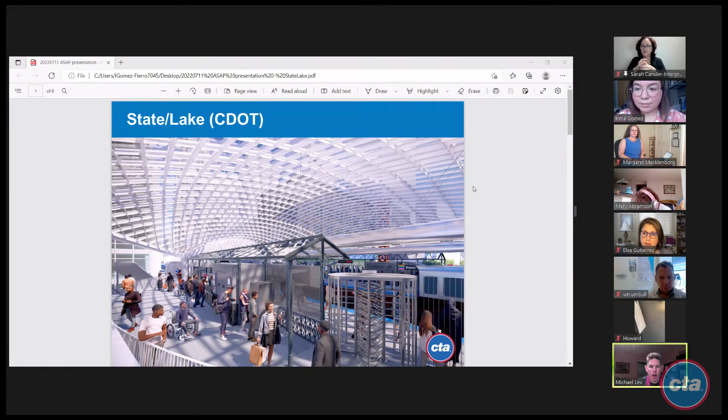CDOT asked that I talk about the improvements being made to this station, which is currently under design. Here you can see a rendering of the new station interior. The station will be totally replaced, and one of the features is a full coverage canopy to better protect all riders from inclement weather, in addition to providing much more space for circulation, making the station accessible, and providing larger platforms.

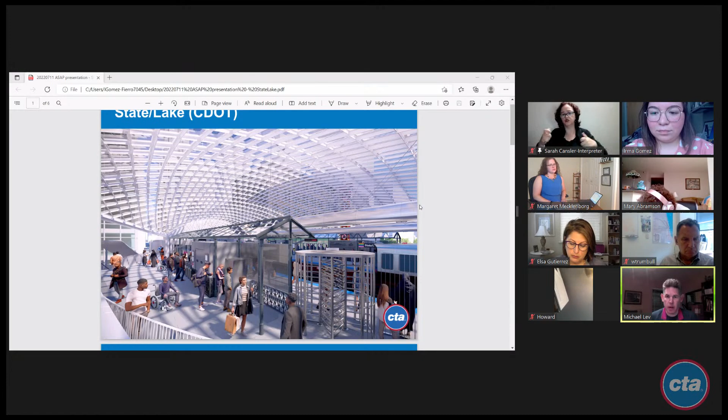If you want to flip to the next slide. So here you can see a street level view of the station. The station will operate similar to the way it does today, with platforms on both outside parts of the station, where generally you take the stairs, but for step-free access, you would take the elevator on the side of the street where you're boarding the train. There will also be escalator access on the east side of the station. In terms of step-free access, you would choose the elevator on the side where you're boarding.

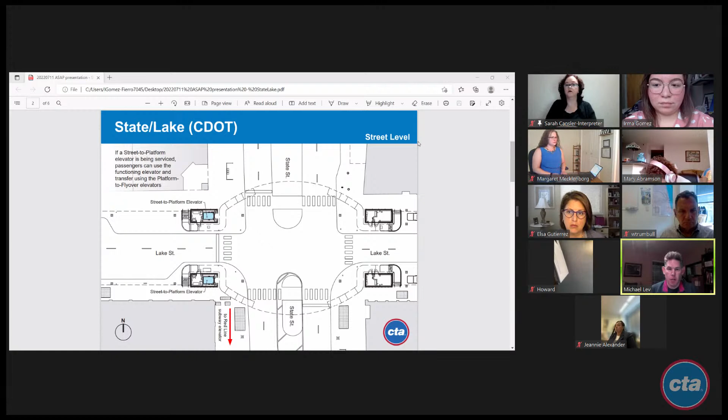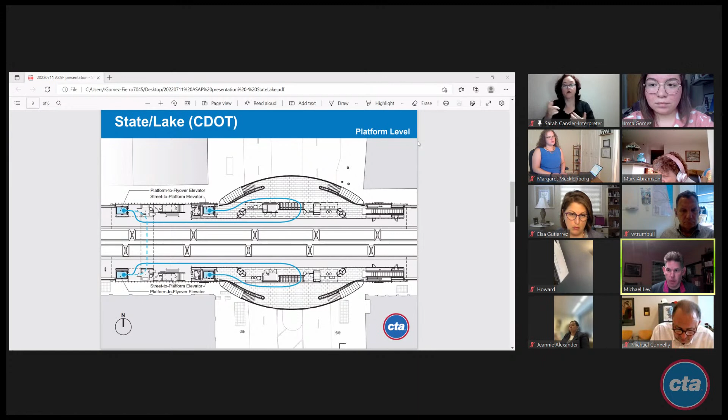You can see them here identified on the left side of the screen in blue. If you would like to move to the next slide. Additionally, a new feature of this station will be a crossover bridge where, after paying your fare, you can get from one side of the station to the other. This will also be accessible step-free via elevator. This will allow for transfers, or if you accidentally board on the wrong side, or if one of the elevators is not functioning, this provides redundancy. Next slide.

An additional feature of this improvement is an upgrade of the northern mezzanine of the Lake Red Line subway station, the mezzanine between Lake and Randolph. This mezzanine will be upgraded to have step-free elevator access as well. Right now, you are able to make a free Ventra fare card transfer between the two, and that will continue to be the case, where you exit one station and walk on the sidewalk to get between them. But this will greatly improve step-free accessibility at this northern mezzanine.

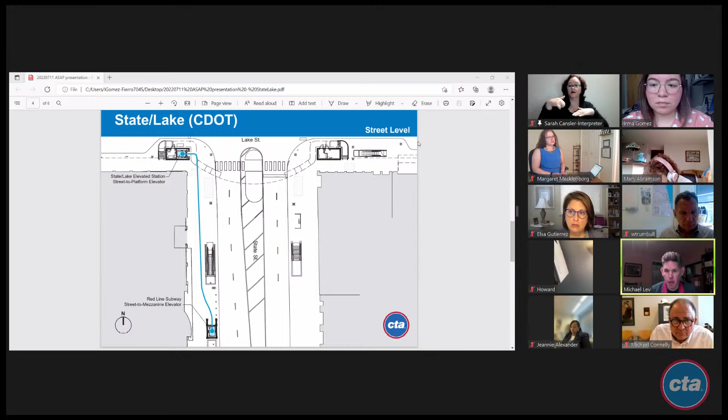In terms of general upgrades to the station, as the elevated station is totally being replaced, it will be upgraded to have full standard CTA signage, including braille and illuminated signage, as are the new standards for better readability. If you move to the next slide.

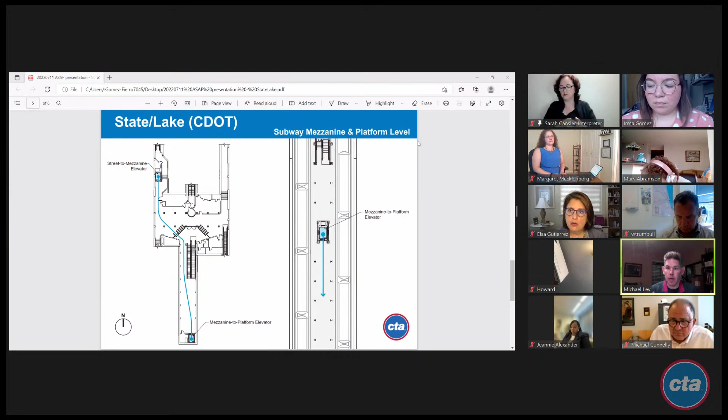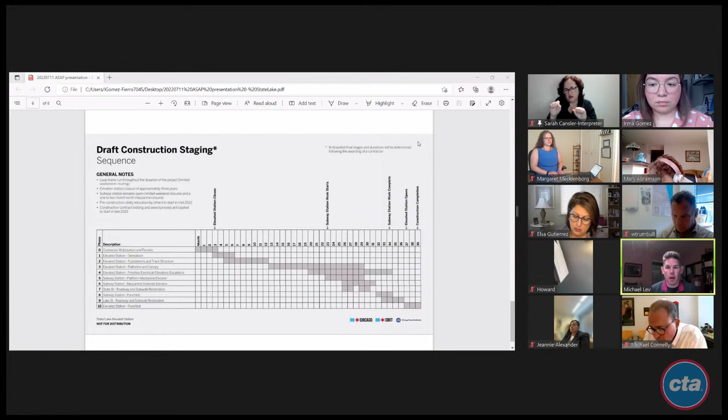The subway station will not be closed during construction, except for a couple of weekends. We are anticipating that the subway work would happen approximately halfway through the duration of the project. I believe that's my last slide.

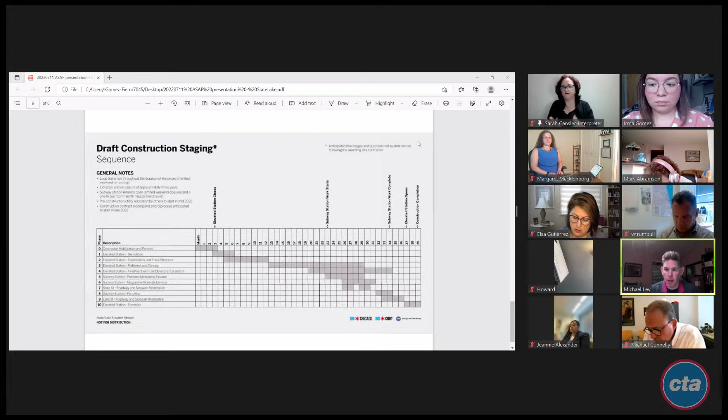This is Whitney Hill. Thank you so much for sharing with us. I'm not sure if this question is best directed to you or someone else within CTA, but my main question is, how will information about the new layout and the accessible routes be presented to riders? I'm curious about after completion, and how we convey this new system to riders.

So I can speak a little bit to what is happening pre-construction. I'd have to defer to CDOT or CTA as to what public information is post-construction. We have been hosting a series of meetings with people in the area, and I know that both CTA and CDOT issued a press release announcing this project. Mike, I think maybe Irma may be able to fill this one.

I know that for previous stations, they've had walkthroughs with the ADA committee after the station has been built. Irma, do you do that still? Yeah, let me just share screen.

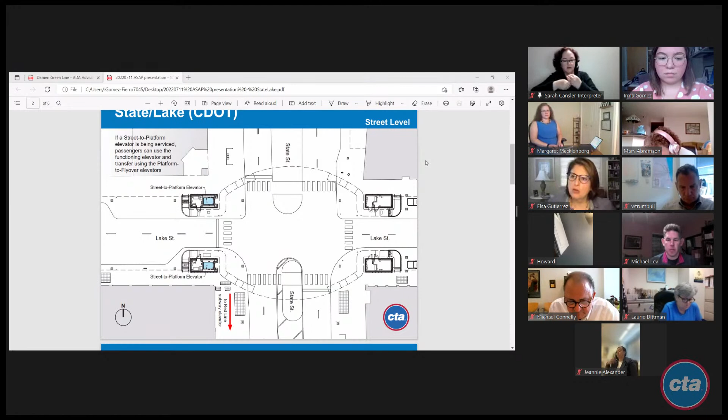I also kind of wanted to tag on to that. I recommend that if CTA's public information or whoever the designated person would be, reach out to as many as possible of the disability related organizations with this press release, but more than press release, info on basically everything pertaining to this, because a lot of the disability related organizations have mailing lists, and they generally put out a newsletter or calendar of events, something like that, monthly, or announcements on a monthly basis, sometimes quarterly. That would help get the information across a broad spectrum of the disability community. Some may not necessarily be affiliated with this committee. I don't know if that would be your public information department or who, but again, to reach out to as many of the disability related organizations as possible so that they could get the information to their people.

Robertson. Just wanted to straighten out the fact that I believe we're in pre-construction phase, so scheduling a walkthrough is probably 2 to 3 years away.

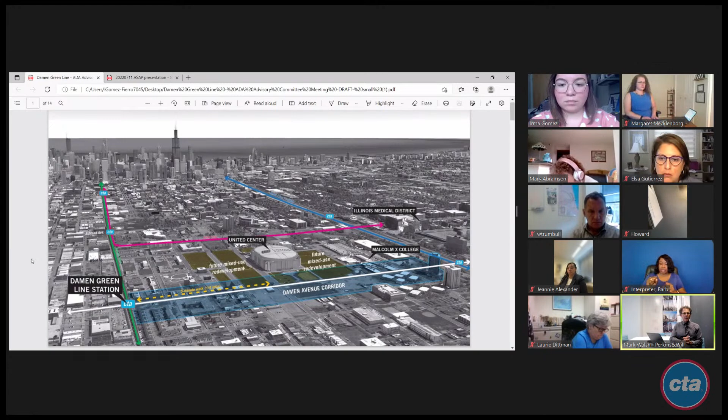Next slide, please. This is the site currently. The station house will go on this site, at the southwest corner of Damen and Lake.

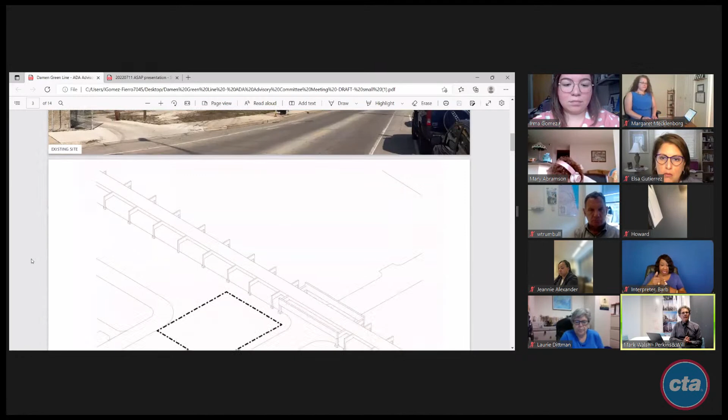Next, please. This is a brief schematic showing that location. You can see the existing CTA tracks running from lower right to upper left, and the dotted line shows where the station is going to go.

Next, please. This is just a schematic view of the station house. We've pushed it back from the Damen side of the site so there's a plaza at the east, and it will be entrance on grade, so there are no steps up or down from street level to plaza to station house.

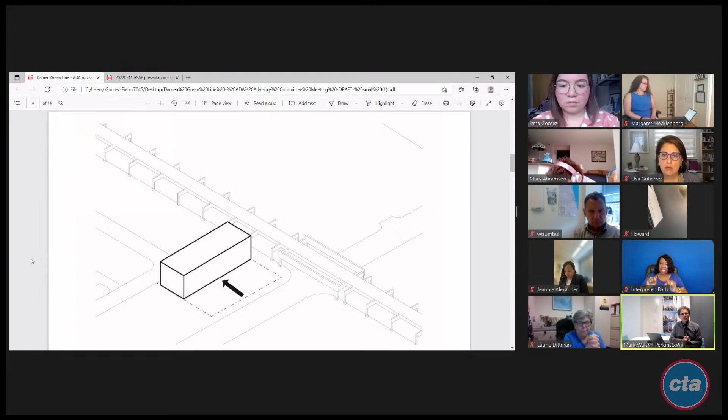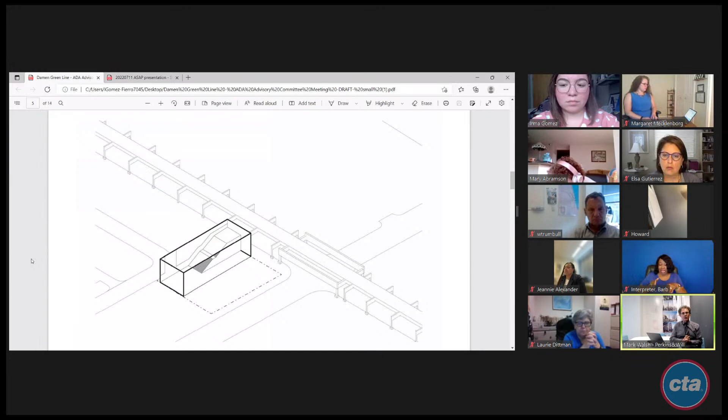Next, please. Here's a schematic showing the walk-up means to get to the platform. There is a large stairway that goes up to the platform level on the eastbound side of the tracks, and there is also an escalator in a similar location.

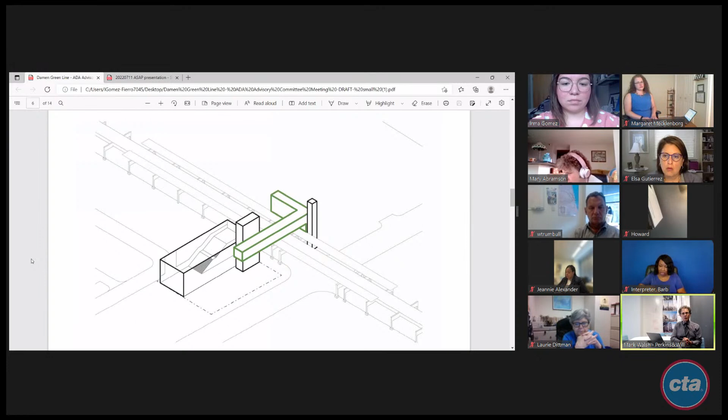Next, please. For step-free access, we have two means: an elevator at the station house that connects directly to the eastbound station, and for access to the westbound station, that elevator goes up to a bridge level that can be traversed across the tracks, with another elevator down at the north side providing access to the westbound side platform.

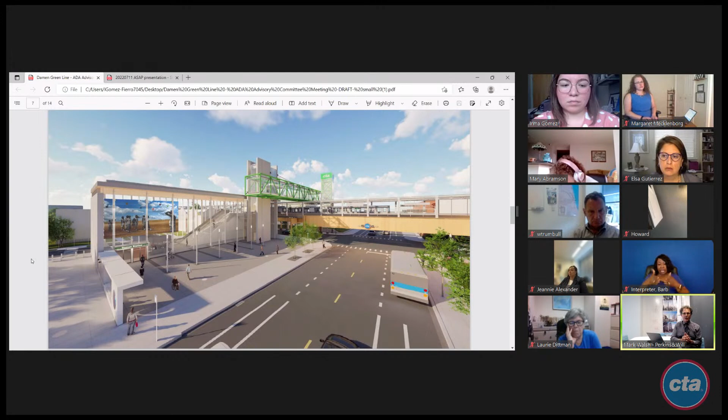Next, please. This is a ground level view of that same station. At the left-hand side is a bus waiting area, with buses running north and southbound for Damen. The entrance to the station is under the green banner at the left-hand side—an on-grade entrance that gets you into the fare area on the non-paid side, with gates that then allow access to the stairs, the escalator, and the elevators.

For what we call surge events, because this is adjacent to the United Center, there will be events where a lot of people use the station. The north side of the station, directly under the bridge at the right-hand side of the tower, has a surge entrance with additional doors and fare stations to accommodate larger numbers of people.

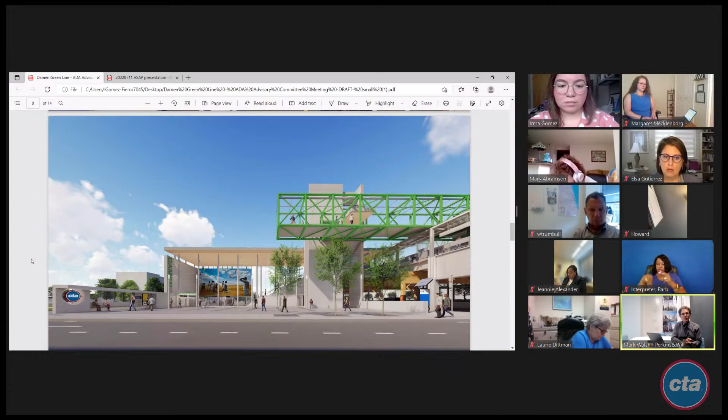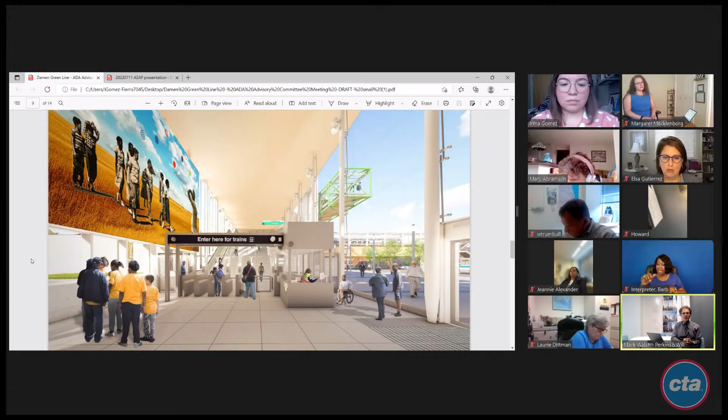Next, please. This is a view inside on the non-paid side of the station house. Typical fare stations here. Behind this view is where the fare machines are, so you can get your Ventra cards at this location.

Throughout the station, since it's new, it will be completely accessible. The signage will be lit where needed, and all signs at person level will have Braille included. You can see there are accessible gates and narrower gates here too, and a kiosk.

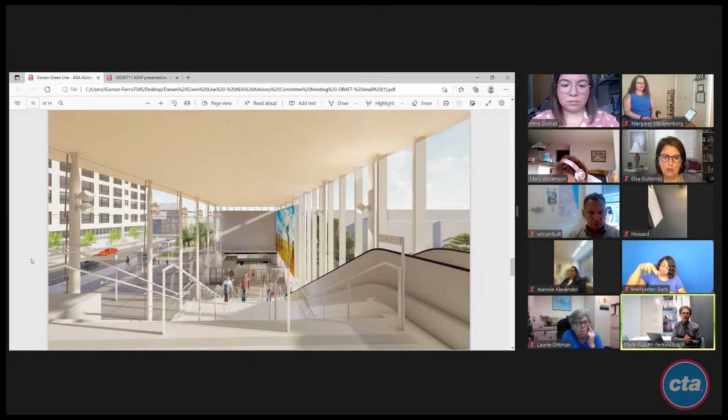This is the opposite view from the top of the steps looking down back towards the station. You can see the escalator on the right-hand side and the fare area down below.

At the top of those stairs, the main stairs from the station house, there's direct non-step access to the eastbound platform, which you can see here. There's stairs up to that bridge that goes across Lake Street, and you can't see them in this image, but immediately to the right of those stairs is where the elevator is that allows step-free access to the bridge.

This is a view of the bridge. This is the south end of the bridge, looking southeast. This is above the tracks and would take you between the eastbound and westbound platforms.

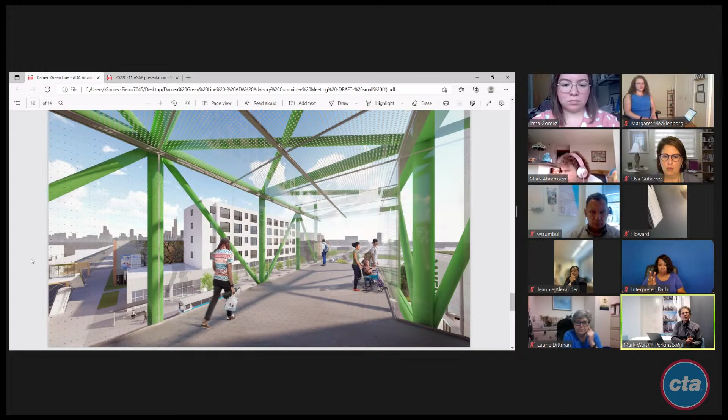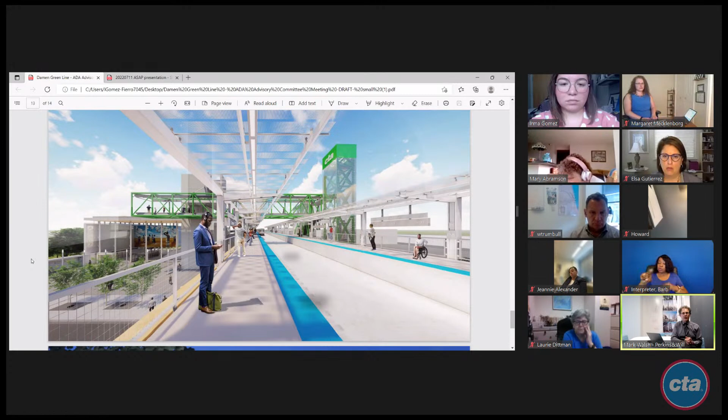View on the eastbound platform looking west. You can see the bridge and the elevators here, and the station house is on the left. This is just the last view, similar to one you've seen before. It's just a dusk view of the station.

As far as the progress of the project and where we are, we're in the final stages of getting our building permit. We have a contractor on board and are starting construction as soon as we get that building permit. Our schedule is to be complete in 2023.

Pending permit receipt, we could start any day now. At the moment, the site is fenced off and ready for construction, as is Lake Street on both sides of Damen, in preparation for some track work that needs to happen to support the station and the station house itself.

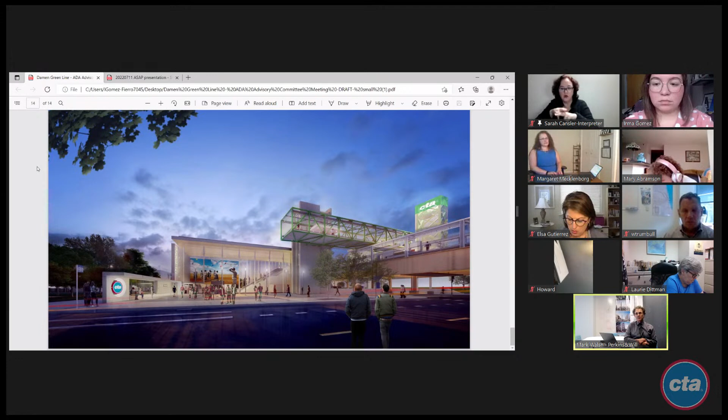This is Mary. Did you say that the bridge will be covered, or is it just open to the wind or in the winter? No, the bridge is completely glass enclosed. It's not heated or cooled, but it is ventilated, and it is protected from wind, rain, and snow. That's good.

There's lighting along the bus stop at the south end of the site. The entire east face of the station house is glass, and that will be lit 24 hours a day. The platforms themselves have standard CTA lighting at standard required CTA levels. And then there's street lighting along both Damen and Lake Street.

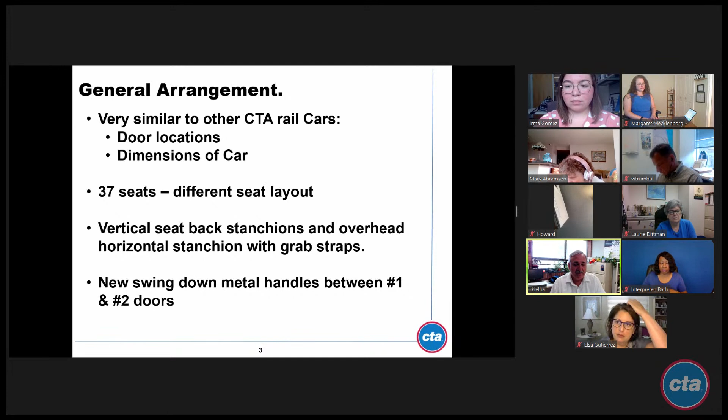Slide 5. Talking a bit about seat locations. I'm going to start at the front of the train, at the cab area, dividing it into 3 sections: the front by the cab up to the doors, in between the doors, and the back of the train from the doors to the back. In the front, there are 4 seats on each side right behind the operator's cab, and those are facing inward towards the aisle.

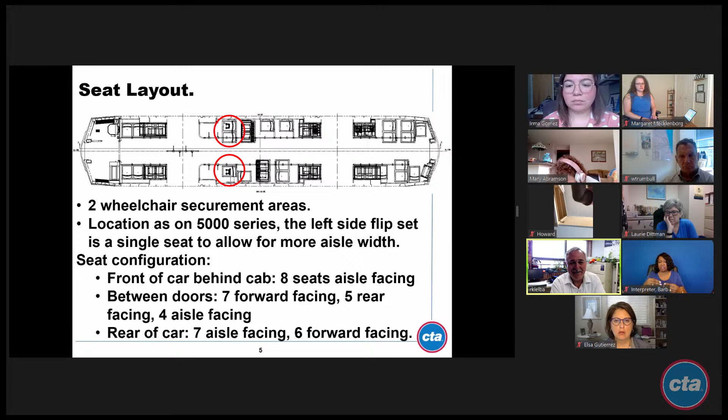Moving on to the next. Door system, same as the 5000 series cars. They're pretty quiet, and the issue before was sometimes you can't hear the door opening, so you don't know if it's open. We've added an additional chime on the exterior of the car, centered over the door. As the doors open, it will start to beep, giving you an idea how to navigate to the door. It will continue to beep for a fixed time as the door is open, and then it will stop, giving sufficient time to navigate and find where that door is.

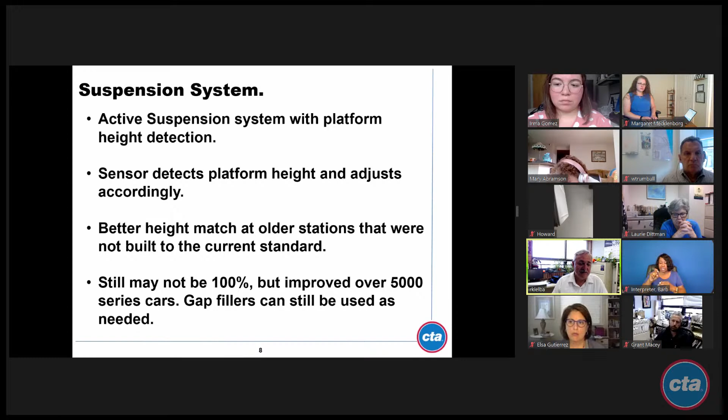That's it for slide 8.

Communication system, not much different for audio messages. We have 6 interior speakers, 4 exterior speakers, the automatic messages are the same voice of CTA that we've had for many years. Similar to what we have on the 5000 series, we have a visual message sign on both ends of the cars, which basically show the text scrolling of what the audio message is saying.

A couple of new features we added: a visual map display and 2 additional message sign displays. The visual map display doesn't show the entire system map, but shows a chunk of the map, like maybe the next 6 stations. So it'll show you your current station and the next 6 stations. There's also additional information up there which tells you which side of the doors will be opening on.

Then there's 2 small screens installed kind of kitty corner across from each other at the number 2 and number 3 doors. This small screen basically repeats some of the route information, next stop information, and can provide public service messages. It's also got a fun little display of on-car video, so it reminds our customers that you're being watched and we're recording video.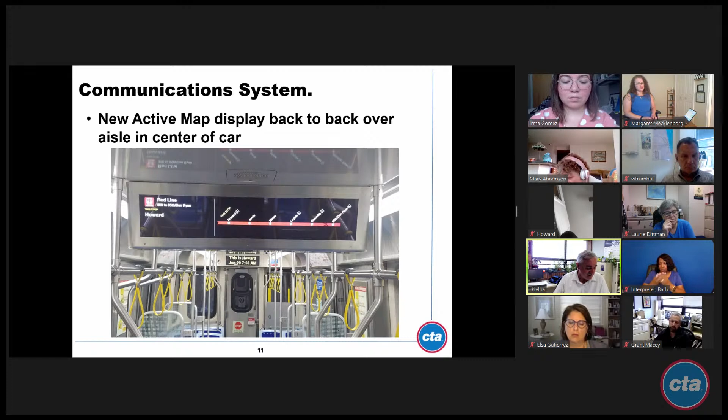So slide 12, it's a visual representation of the additional LCD displays, which are at the number 2 and 3 doors. This one is displaying some information that says your red line run 800 going to 95th Dan Ryan, and this stop is Howard. Plus, there's also additional information that will be displayed on this display periodically.

Slide 13. One of the upgrades that we got from the committee in the past was related to express mode.

The problem is that sometimes CTA has to correct service issues by running some trains express unexpectedly. And I think the thought was that hearing impaired persons could not hear the message saying we're going to run express, and where they're going express to.

So the thought was we'd upgrade those visual message signs, which are at the end of the trains. As an operator is told to go express, he'll enter that information into his control panel, and he'll be able to display a message on those visual message signs.

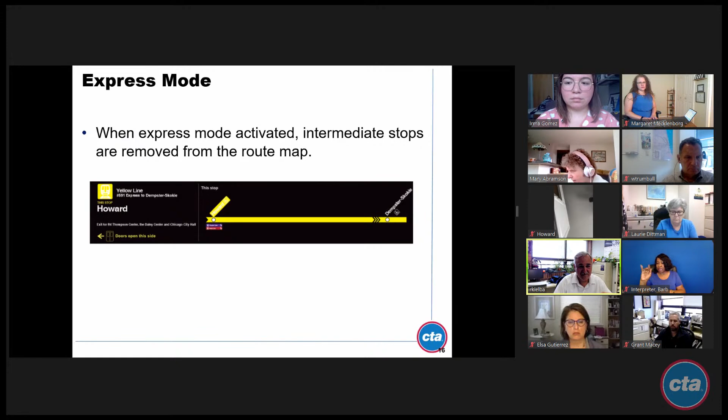And that's all I have. Thank you. Any questions?

This is Mary. I have two quick questions. One is, so now you have a lot of new visual information, but will the audio announcements still tell me which side of the train the doors will open? Yes, all that audio messaging should be exactly the same that you're used to on the other cars.

And could you explain more about those pull down handholds? Are they going to be close to the aisle so that I, as a blind person, might run into this thing if it was pulled down, or are they spring loaded so that as soon as someone lets go, they'll fold back up in place?

Yeah, they are spring loaded. They will swing up. And I think, Mary, you said you were short, so you're not going to have an issue. I'm not going to, but most people are between 5 and 6 feet. Some of the tall guys are well over 6 feet. Yeah, I think once you get around 6'2", you might have a problem with some of the stuff.

It's the same thing with the doorways. The doorways in the train aren't that high, so once you get some pretty tall guys, they have to duck. But with the doors, they'll know that they have to duck, but they won't know where this handle is if someone leaves it pulled down. Yeah, no, the handle does not stay down. It swings up. That's good.

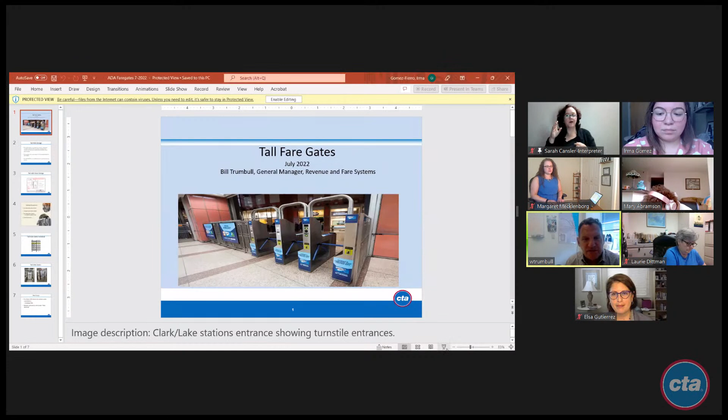Hello, can you hear me all right? Good, yes. My name is Bill Trumbull, and I'm the general manager of our fare systems. I'm a 60-year-old white male with short curly hair wearing a very boring brown and blue striped shirt, sitting in my office. My presentation is not nearly as exciting as 2 new rail stations and 400 new rail cars, but I'll try to walk through this.

What you see here in this picture is a typical fare array. I think this is the State of Illinois building with the turnstiles all in a row. At the far end is what we call the swing gate, or the ADA accessible gate, closest to the CA booth. If you could go to the next slide.

We had a request when we were building some new stations that we would provide what we now call tall ADA doors, designed to provide wheelchair access to CTA rail stations, particularly those entrances that may not always be staffed with a customer service representative. The prime example would be the Wilson station at the Sunnyside entrance, where it's accessible, there's ramps up to the platform, but there is not always a representative there to provide assistance.

They operate in exactly the same manner as the existing swing gates, with the exit button and the Ventra card tap. But one enhancement is that the exit button is more difficult to reach. If you spend any time in a station, you'll see people just reach over to hit the exit button and evade paying the fare, just walking through. So this design has really two purposes: one is to provide access to unmanned or unstaffed stations, and the other is to make it more difficult to evade the fare with the exit button.

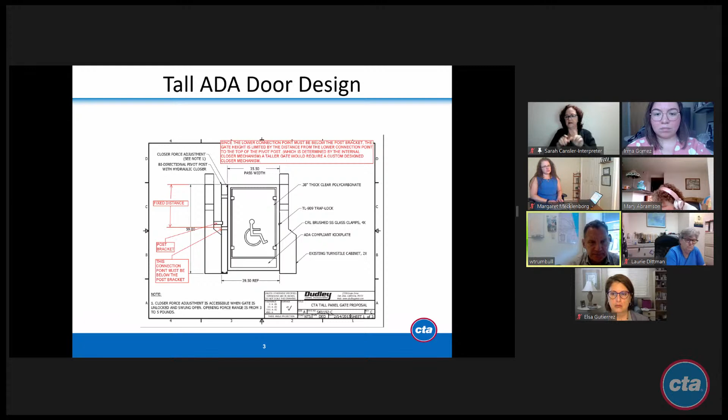Next one, I think we have some pictures. So if we talk about stations now, right now there are 612 turnstiles, the reversible gates that spin. There's 76 high barrier gates on the system, also at unstaffed entrances, which are like the interlocking gates that swing around. And then we have 121 swing gates, the lower ones, the accessible gates that we're going to be replacing. But there are 33 stations without swing gates, so those stations are not accessible at all, and we're going to have to address those as we go forward.

To date, we have installed 18 of the new tall ADA doors. You'll see the lower right-hand picture, I think that's the Pulaski entrance on the Green Line, which has the tall ADA door, different looking than the upper right-hand picture, which is the small swing gate. I think we have some more pictures coming up.

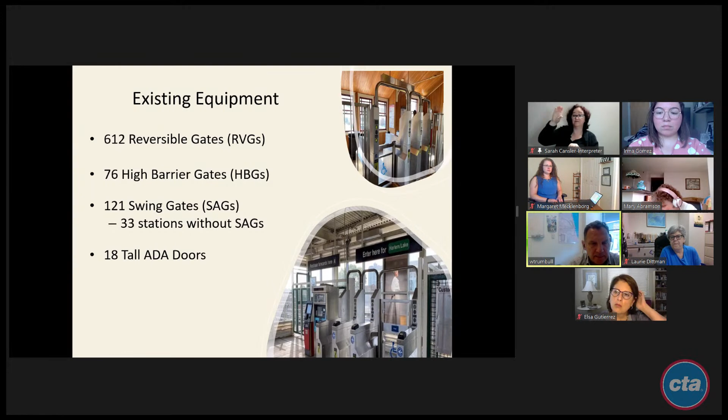Our next plan is to purchase enough ADA doors for system-wide installation to replace all of the existing swing gates with the tall ADA doors. The schedule for that is to be determined - we're still going through the contracting issues.